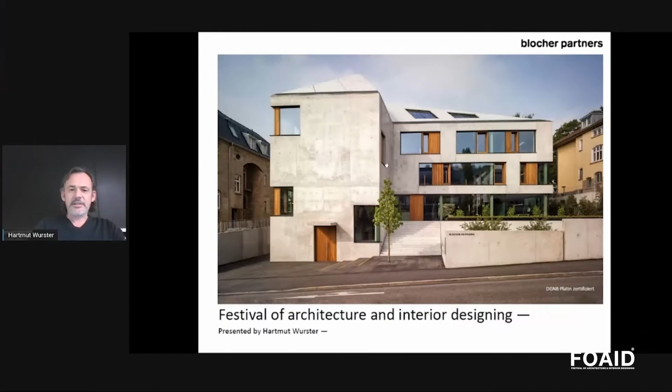We are at the moment in that big global crisis of a pandemic, so I think ideas of sustainability are a very important topic. I try to connect a little bit the work which we do with the parameters and connection towards sustainability.

First of all, a little introduction to our office. Our office has 230 people all over the globe. We are 24 nationalities with 15 expertises. Most of the people are architects in our office. We have a lot of interior designers, also communication specialists, product designers, and some administration people.

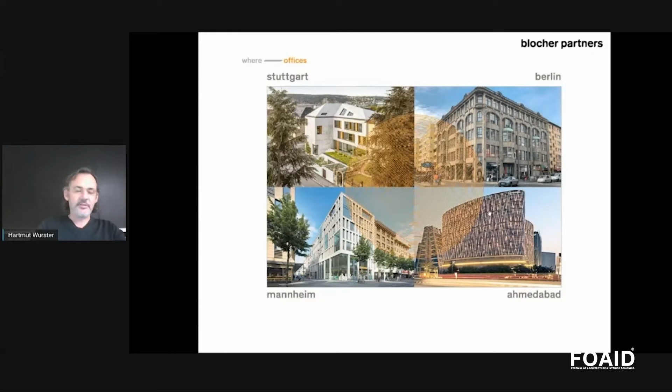We have four offices: the main office in Stuttgart, an office in Berlin, an office in Mannheim, where I'm sitting right now, and the office where I normally sit, in India, in Ahmedabad, which I came to 10 years ago and started this office from there. We see also that building, which was one of the first designs we did in India.

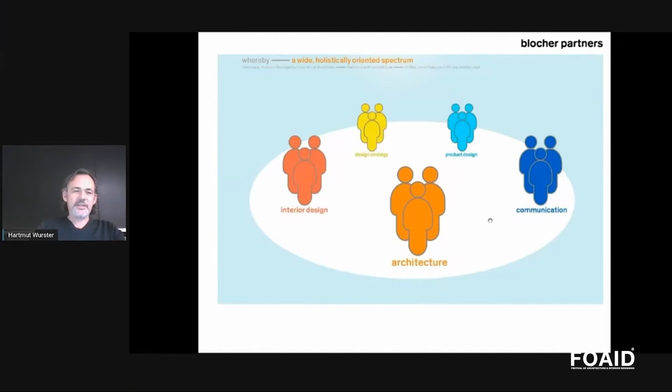As I said before, we have many disciplines connected in our office. One of our very important ways of working is transdisciplinarity, and I think in this way we can achieve very good results if we get the input of certain disciplines at a very early stage of the project already.

We have finished more than 1,000 realized projects in 32 countries all over the globe, while India is a little different, because we have a full scope office there. Otherwise, normally we do just the concept designs, and then it goes to local architects for execution.

A little bit about my own story, since we're talking about sustainability. I grew up in a time in Germany where the green movement just started, and I was very much involved in that movement. It became part of my teenage years, and I was involved in certain projects.

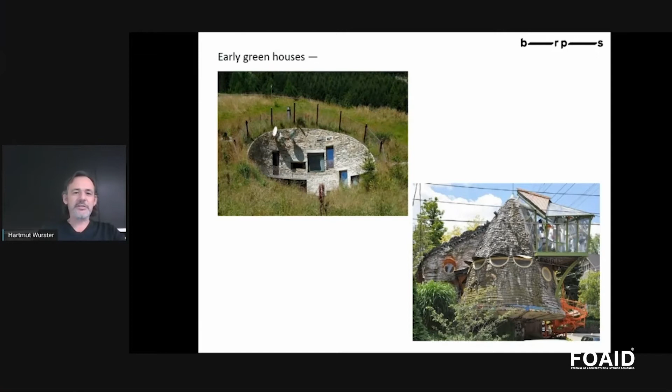If we talk about sustainability, I actually don't like that word. It's a word which didn't exist when I started to get involved in the green movement. Sustainability came up later, and I think it's one of the most misused words which we have in this area.

For example, just one example: I was in Ahmedabad in February when Donald Trump and his daughter Ivanka were there. The next day, the newspapers were showing a picture of Ivanka Trump because she was wearing a dress she had worn before, and it was called in the newspaper headline 'Statement for Sustainability.'

So if that is an idea of sustainability, wearing a shirt twice, that is not what we should talk about. I think it's very important that we have a real, and not fake, interest in what we are doing.

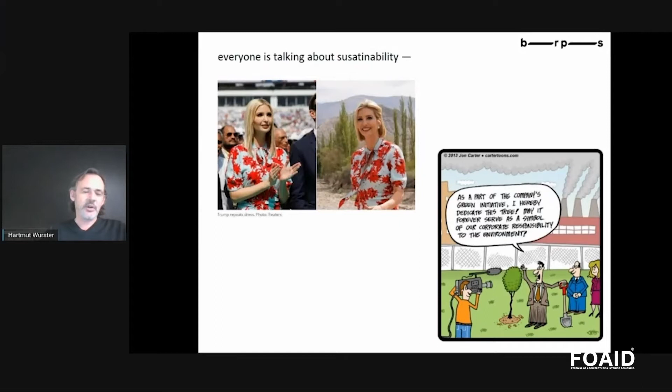What is the aim of sustainability? If we talk about it in a real and not fake way, I think the aim is obviously, as an architect, we have to concentrate on our task. Sustainability means a perfect, good use of the resources in construction, as well as good planning in the use of a meaningful use of the resources during the operation time. All together, that should be in balance with our planet and in harmony with our planet.

The final part, where will that lead, or what will be the parts of where it will guide us, would be the enhancing of well-being, of balance, and obviously health of the people.

I think how we build our environment is a way how we see ourselves as humans, and vice versa, as architects who are building this environment. We have a huge responsibility because this environment also builds us, or has an effect on what we are as humans and how we see ourselves as humans.

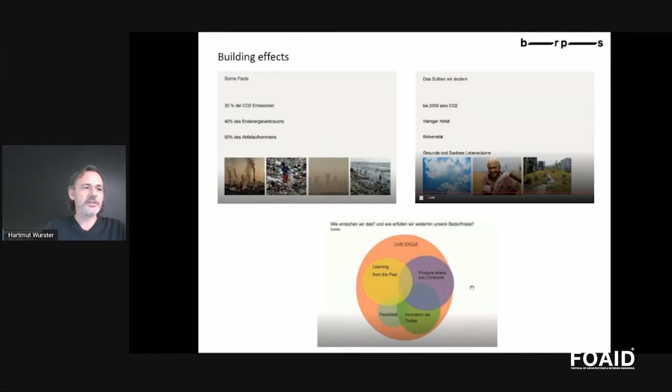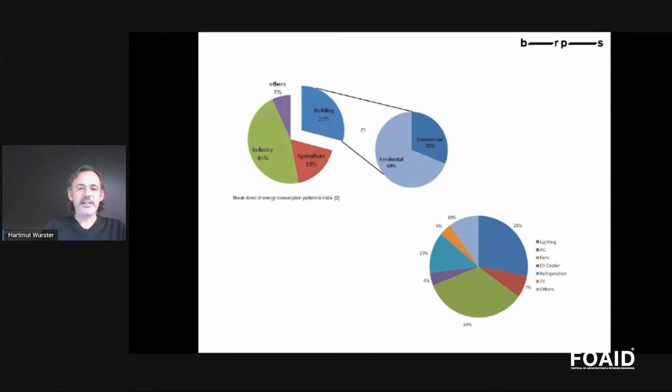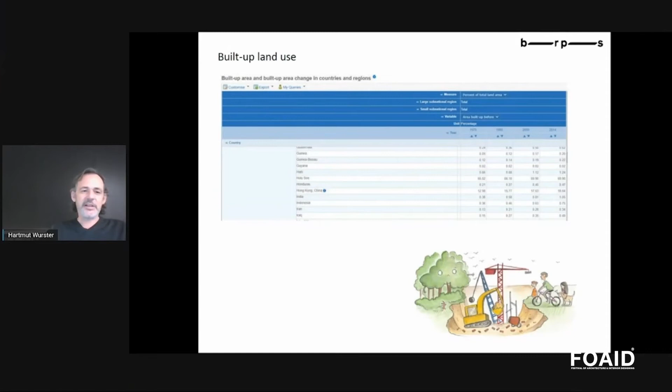The picture below shows a little bit what I always feel. Obviously, as architects, we are building, but what we are doing when the digging starts and we go to the site of one of our new projects, I always get a little bit melancholic, because I feel that the surface of our planet, which is touched now and disrupted in a way that was grown in millions of years, will never be the same again after we do what we have to do.

So, what is sustainability? I think a lot of people have now spoken about sustainability, also in the weeks and months of the lockdown. I think many people have listened to webinars, and I don't think it's necessary to talk there in detail.

But I think architecture is a spatial philosophy. In the past, we were thinking about what is a human and what are the human's needs. Now we have to add one parameter: what is the need of the planet. That, I think, is the main thing when we talk about sustainability, to widen this mindset.

And what I would like to show is that we won't change the world, and we won't make a sustainable future within one day or within one year. But I want to show, along with our projects, the little small factors which we have added in our projects towards a more sustainable built environment.

I think what is important is that we have to be happy about the small achievements which we are able to do in our daily work.

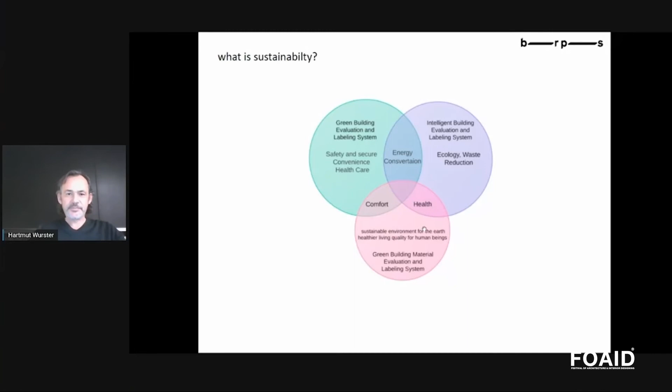So I would like to start with one project in Stuttgart because that project was, as I said, a comparatively small project, but it has a lot of parameters with a very high sophisticated way of including parameters of sustainability.

In average, or in the later projects which I show, I would focus on such parameters like reaction on climate context, orientation, life cycle, flexibility, then material selection, which is very important—local, recycled, low embodied energy—reduction of operating energy with maximum use of natural light, natural air circulation, insulation, shading.

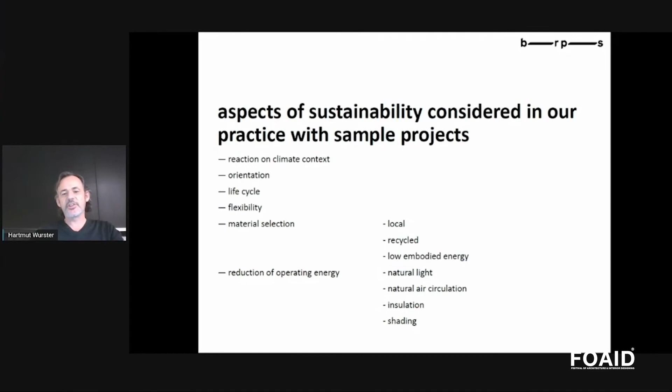And then finally, also the part about green: how to add green, the positive effects of green, inviting nature into our built environment, the biodiversity, cooling with evaporation or shading, or alternative cooling systems. So last but not least, the green points—the positive effects of inviting nature into the built environment.

If we add green in our buildings, it has an effect on biodiversity. It has an effect on cooling with evaporation, but also with shading. It has an effect on air quality, on noise reduction, and finally, it has an effect on happiness, productivity, and the friendly environment in our cities.

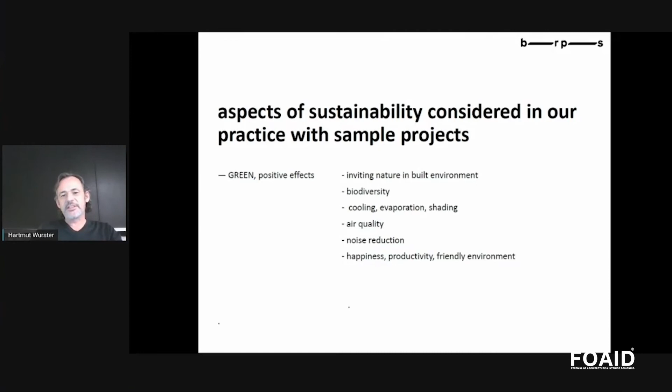I think that in the past we always had this idea: there is the built area, the urban context, the urban environment, and there is nature. That is what has to change. We have to bring nature back into our cities, or we have to see our buildings, our cities, as part of nature.

So here are some of the buildings which I will show. We would start with that building, as I said, in Germany, which is the main headquarters of our office. It's in Stuttgart, and it's our office building with many parameters of sustainability considered.

It was rated as the first building, the first office building in Germany with the DGNB standard, which is the German Society for Sustainable Buildings, as a gold rating—extremely high compared to LEED or other ratings in Germany. It's very difficult to achieve, and it was very much widely published.

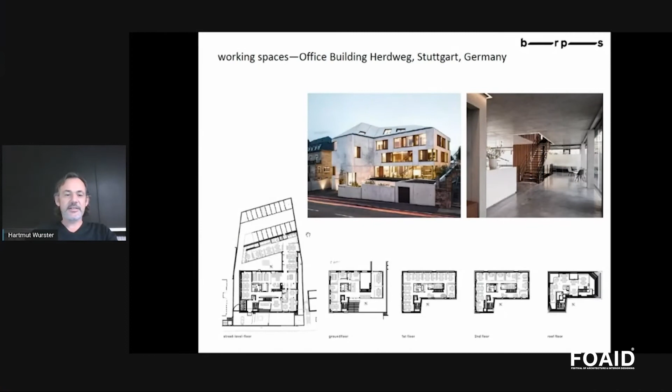We see the floor plans here. We have four floors in that building. We see the section above the parking. We have a green garden.

We thought a lot about how to use the natural resources we have: sunlight, wind, rainwater. But also in this project, geothermal thermal energy had a big effect, added to the overall concept for sustainability.

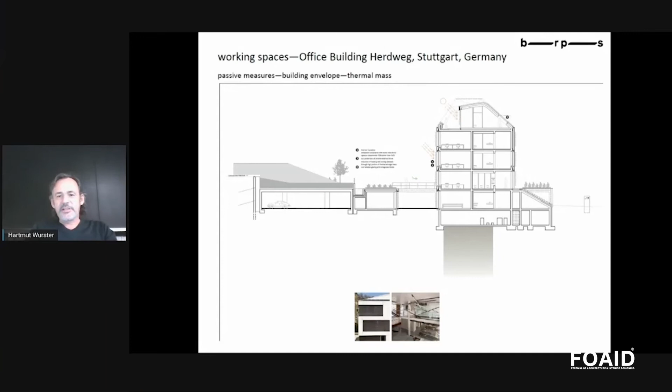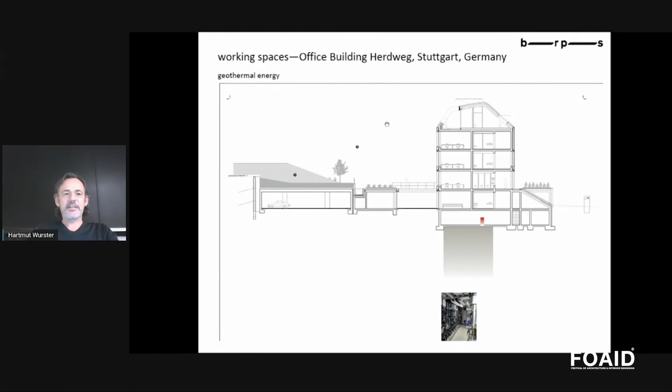An important role is played by the envelope of the building, which has complete insulation, and we reuse the rainwater for the garden. We also have a grey water system in the house. The geothermal energy is used for heating and cooling as well.

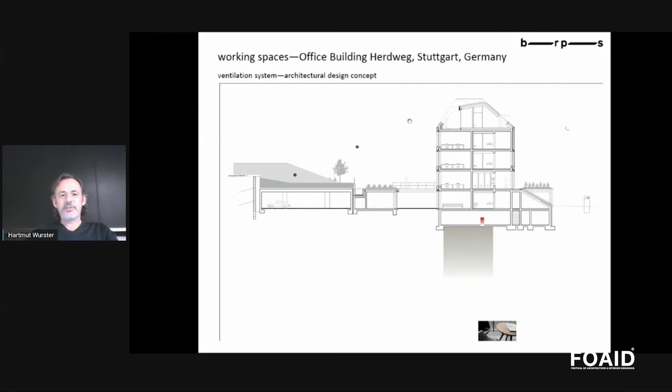Domestic water heating happens mainly with thermal solar energy, along with heating and cooling distribution and ventilation systems. The ventilation system works with earth channels, but we also have individually openable windows to guarantee good air exchange and airflow. The lighting makes maximum use of natural light with intelligent use of artificial light.

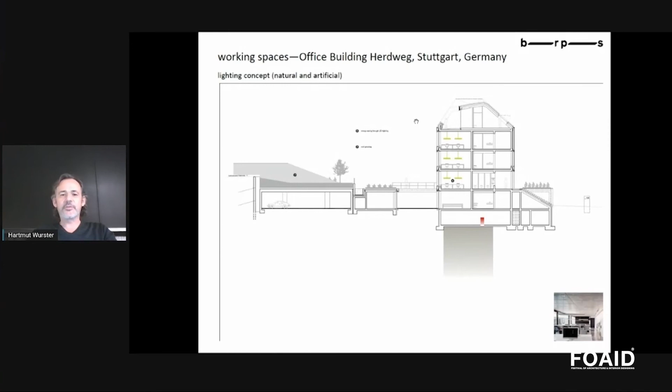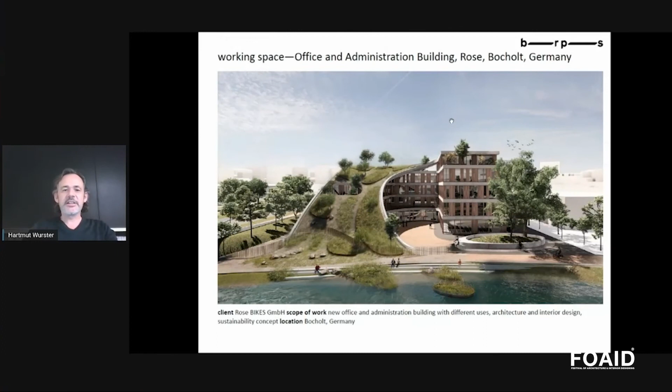We come directly to the next building, which has a quite fresh design. It is a building for Rose, a manufacturer of bicycles, with a green environment sloping on the roof, which has many positive effects in terms of insulation, evaporation, and cooling. It's also used as an area for the people working there to relax and chill, as we see in this picture.

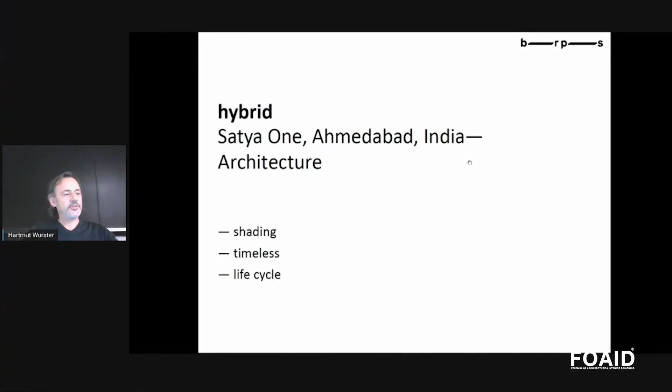Now we move from the projects in Germany to India. We'll start with a project in Ahmedabad called Satya One. It's a commercial building with offices and retail.

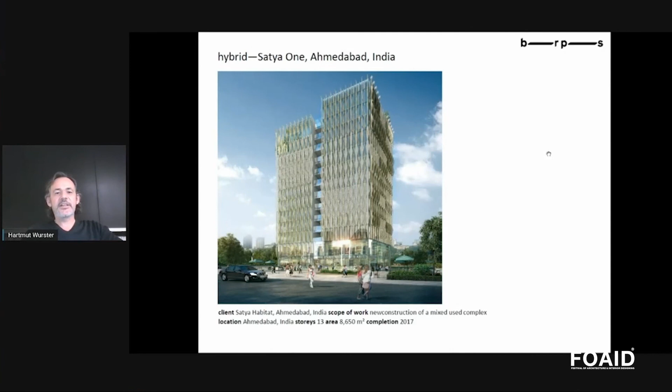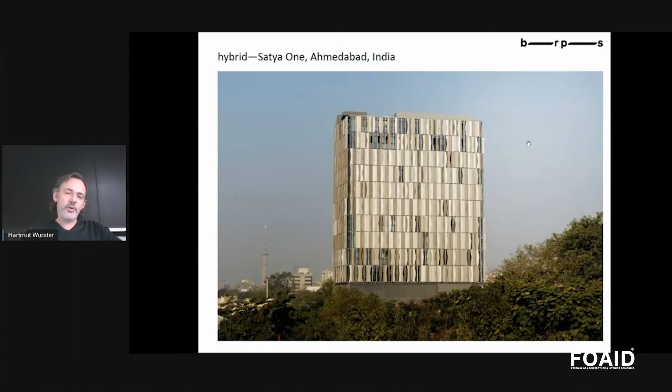In this context, we can start directly with one very important parameter of sustainability: the life cycle. It begins at a very early stage of design, because if we design a minimal sculpture, it is also a timeless expression, and the more timeless our buildings are, the more likely we achieve a long lifespan for the building.

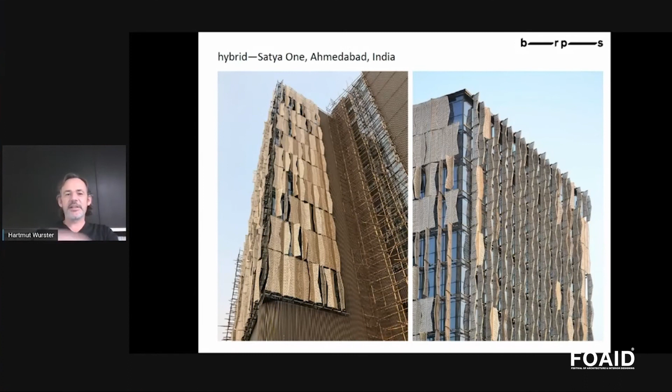The building is completely covered by a layer of shading elements, which took inspiration from traditional Indian context—as everyone knows, the jalis. We developed a form of shading system which operates, opening and closing like the wings of butterflies. It's not an electric system, it's a manual system.

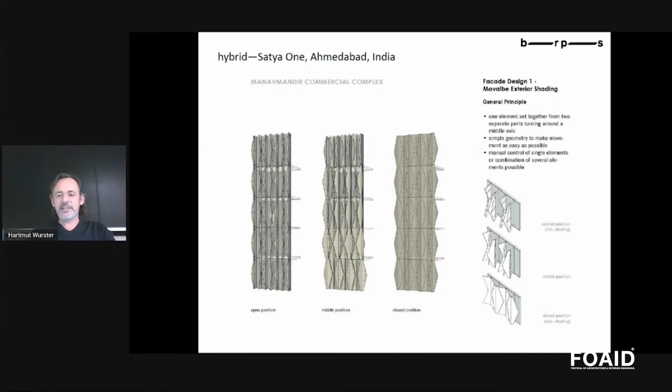That means the people using this building will change the look of the sculpture every day according to the open or closed parts of it. We see here a close-up of the shading elements, and here the traditional jalis, a picture I believe from Jaipur.

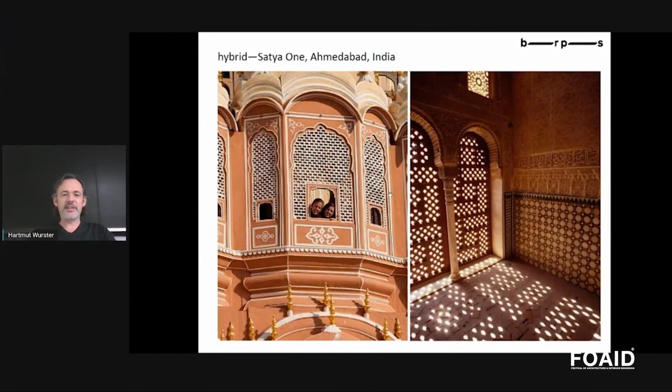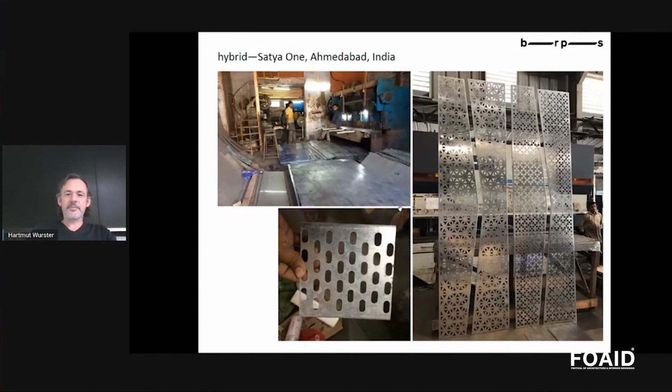What is also an important factor in this project is that we did not find a contractor somewhere else in the world and import this to India. We developed this, and also the mechanical system, with a local small contractor. I think that's an important part of sustainability—to be local, to develop local. And actually, it's also a pleasure.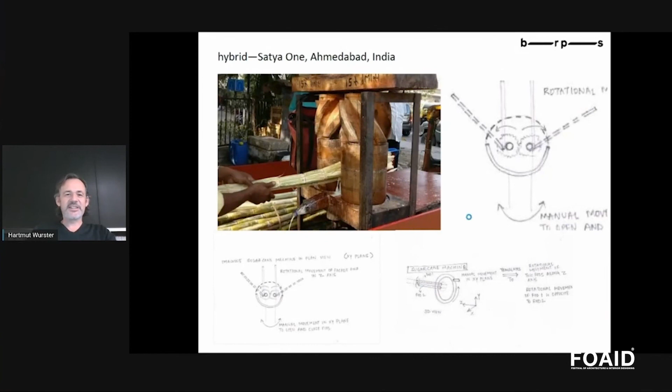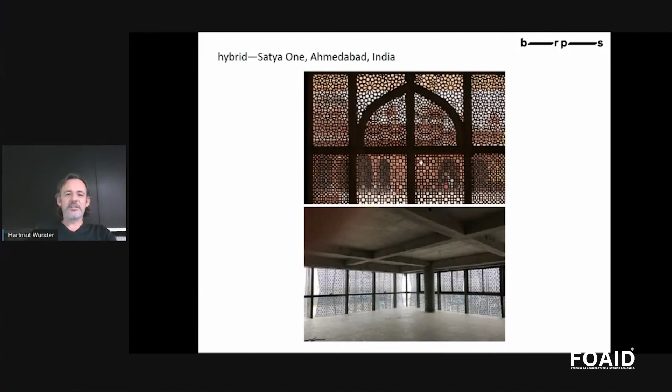The mechanism is a little bit like sugarcane pressings. If we look from the inside, it also has a very nice effect. Here is a comparison between the interior of a traditional jali and one office space floor.

We come to the next building, a big mall—actually the biggest mall in Sri Lanka. It is Odel, in the center of Colombo, and it is a mixed-use building. Most of it is retail, but we also have residential on top.

We have a healthcare center, residential, and retail in this building, with the residential on top. The difficult challenge in this project was the huge mass of the building—9 floors—and to make it attractive in the urban context, we had to break down that mass.

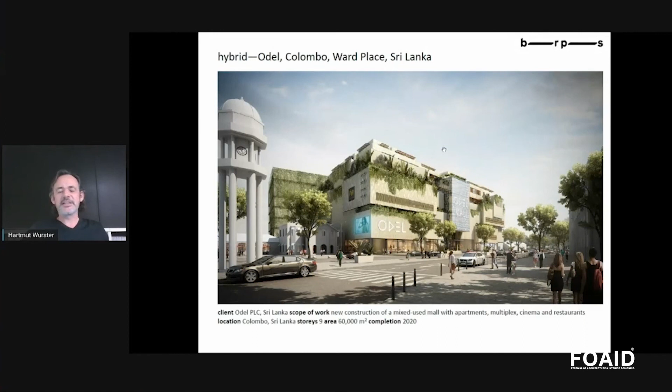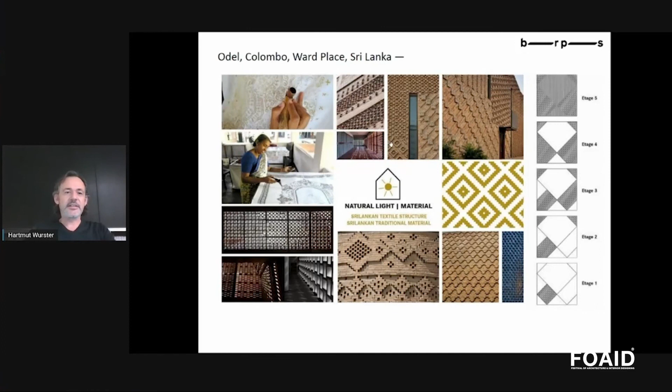We first started breaking down the mass with the volumes themselves, but then we also looked for historic patterns in the context, which create an interesting surface with light and shade, and bring a certain diversity to this huge building mass. Now we come to the next building, Mondeal Heights.